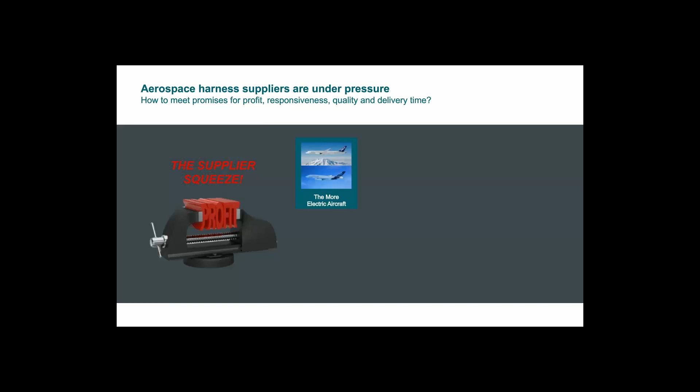Thank you, Steve. So let's get into it. Aerospace harness suppliers are under increasing pressure, and whether they're within an OEM or acting as an independent supplier, these manufacturing teams are under more stress than ever. They find their business suffering from profitability constraints on all sides, from increased harness complexity driven by more electric platforms to the need to rapidly transition design changes into production, to serving demanding customers who expect ever lower cost assemblies delivered just in time, while they threaten to further vertically integrate into harness manufacture.

Meanwhile, platform designers are changing their electrical systems and consequently their harnesses ever more frequently to respond to the changing demands of their customers. They expect their harness suppliers to keep up, transitioning these changes into production quickly and with a minimum of cost and schedule impact. These trends in the industry make it ever more difficult for harness manufacturers to meet expectations for responsiveness, quality, delivery time, and profitability.

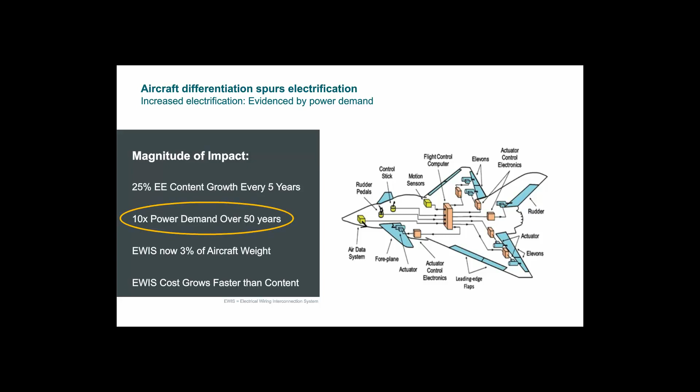You can see both of these trends depicted in this military aircraft example. This has led to a vast increase in the number and extent of electrical systems on aircraft. We can see just how much by examining the amount of power generated on a modern aircraft. While electrical power generation has been increasing throughout the history of aviation, over the last 50 years, it's increased by a factor of 10. Most of that has arrived with what is known as the more electric aircraft.

For example, Boeing 787 can now produce about a megawatt of electrical power. That means that on a 19-hour flight from New York to Singapore, the 787 produces enough power, or could produce enough power, to supply 21 American homes for a month. That's a lot of power.

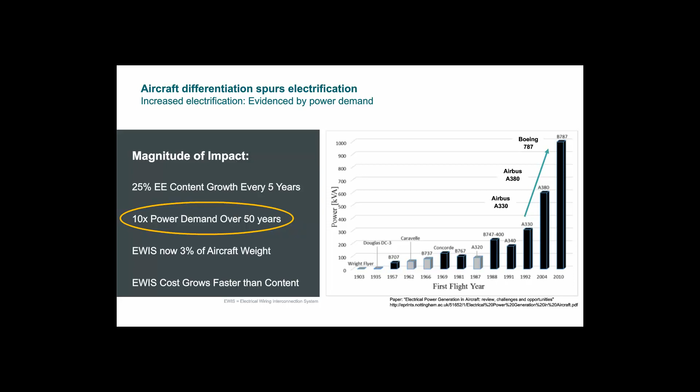This increase in reliance on electrical systems has had a consequent impact on the complexity of the aircraft electrical distribution system, or EWIS. Today, it's not unusual for modern aircraft to support electrical systems with more than 500 kilometers in total cable length, up to 100,000 wires, and more than 40,000 connectors. The electrical wiring system now represents a significant weight driver, comprising about 3% of total aircraft weight. It can exceed 7,000 kilograms on some aircraft.

This relatively new reliance on electrical systems has substantially increased the risk our programs face, especially as they transition to production. Current processes were developed for a world where most of the functionality was implemented mechanically, including pneumatics and hydraulics. As an industry, we know how to work around late-breaking problems in these disciplines without major program iterations.

Now, with electrical front and center in new capability implementation, and this includes networks and software, there is a lot more at stake. A problem discovered in first article integration or transition to production can mean a major development cycle, potentially costing billions of unexpected dollars. This not only puts a program at risk, its cost and schedule, but also the reputations of the program team, the reputation of the business unit, and in the worst case, the viability of the company itself.

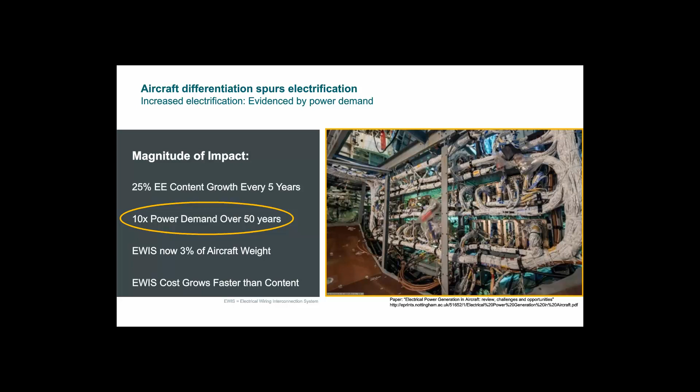At the same time, platform OEMs are requesting more changes to implement the EWIS than ever before. First, they must increasingly respond to their customers' needs for bespoke platform configurations. They not only must answer these demands from their customers, but they are also using responsiveness as a way to differentiate themselves and gain competitive advantage.

Next, regulatory flight certification is becoming more and more stringent. Not only are the regulations changing in response to new incidents, but the ability to avoid their application through grandfathering of new aircraft variants has disappeared.

Finally, OEMs and suppliers must integrate changes arising from electrical system design improvements for cost reduction, manufacturability, reliability, and performance.

Together, these vectors of change stress harness manufacturers, whether they are vertically integrated teams within the OEMs or external Tier 1 suppliers. They need to respond to change from both the OEMs and their own harness product and process engineering teams. And they must do this urgently, as electrical system changes are frequently communicated at the last minute, with little time to spare if a production program is to meet its schedule.

All this results in a new harness manufacturing reality: more harness variants produced in more frequent, shorter duration production runs, and in smaller quantities. So Steve's going to examine what this can mean for achieving profitability.

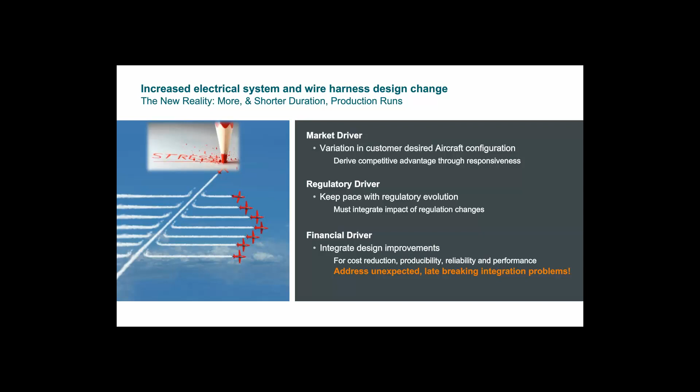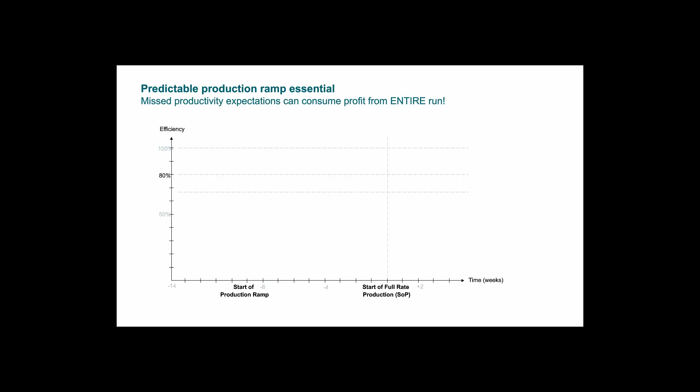Okay, thanks, Anthony. I wanted to talk a little bit in the context of what Anthony was discussing, about one of the challenges, which really comes up when you look at your ramp up of production, as well as incorporating changes. If you look at the chart here, we've got an efficiency level on the left and a period of time. Typically, a manufacturer will sit down and come up with a ramp up plan, and it'll start ahead of having to achieve full rate production, which is represented as SOP here, start of production. This probably looks real familiar to everybody. It's a typical learning curve in a ramp up.

The reality, though, where the challenge comes in, is we're trying to get to our profit level at the 80% point. However, when we implement this, things can happen, right?

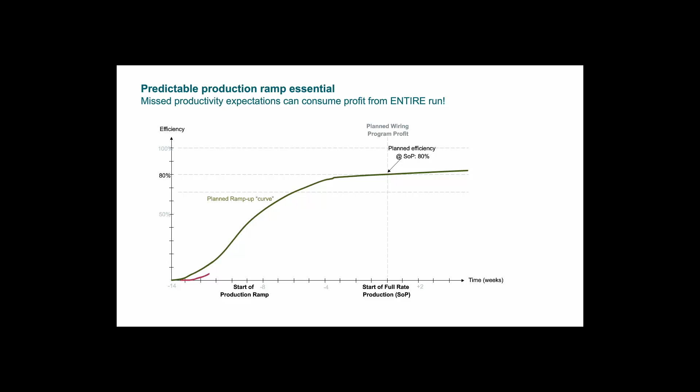If a harness is complex, humans are planning this process, therefore mistakes get made. It could be in the tooling, it could be in work instructions or any of the other production artifacts. So what actually happens is this sort of sawtooth of progress, with a little bit of backstepping as issues get found and have to be resolved.

Of course, while we're addressing the issues, time continues to move, and eventually we find ourselves at the point where we're ready to start, or the date we set for starting full production, but we're below our target efficiency. So in this case, our target was 80%, and let's say we're at 67%.

Eventually we get to 80%, but at that point we may have actually lost our entire profit for our production run. And when you combine that with the frequent and shorter production durations, this really is a recipe for disaster from a margin standpoint for our organization.

So Tony's going to talk a little bit about some of the things that can be done to improve this situation.

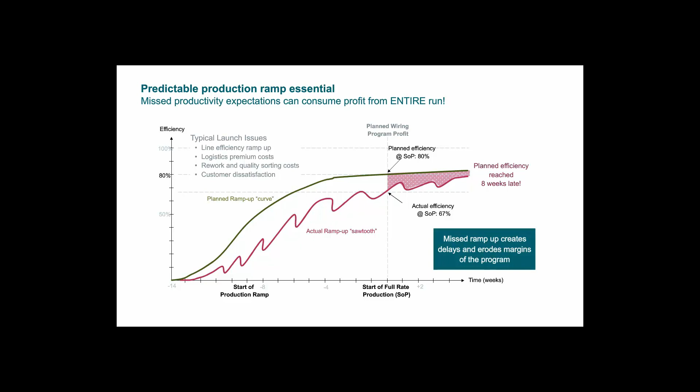Before I get there, I'll mention that this situation is actually even worse than Steve mentioned, because our ability to avoid and recover from these mistakes is being hampered as we lose our best people to retirement. I won't spend a lot of time on this, but a generational demographic shift is underway in our workforce right now, and our largest, most skilled employee cohort, the baby boom, is retiring. As they leave all our organizations, not just the manufacturing ones, the expertise and tribal knowledge we've relied upon to proactively avoid error is leaving too.

This means it is even harder for our teams to deal with the challenges presented by the demands of modern harness manufacture.

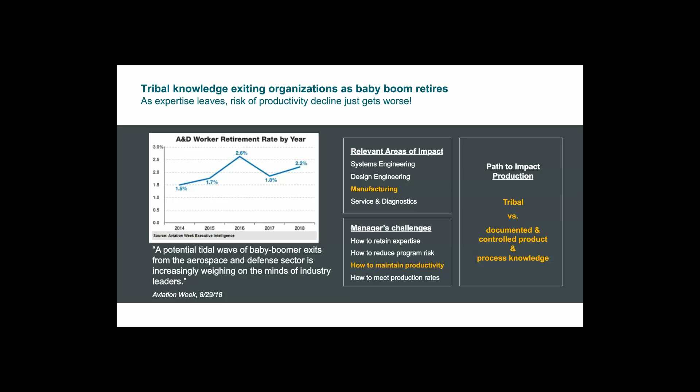Finally, the tools used by most harness manufacturers today don't make their task any easier. Generally, the state-of-the-art for manufacturing engineering employs manual processes and slow, disconnected tool sets. These processes are time-consuming and expensive. They often miss or even introduce errors into manufacturing tooling and work instructions, leaving issues to be found late in the game, even after the manufacturing cycle has begun. This forces expensive design iterations and process changes.

So what are we to do?

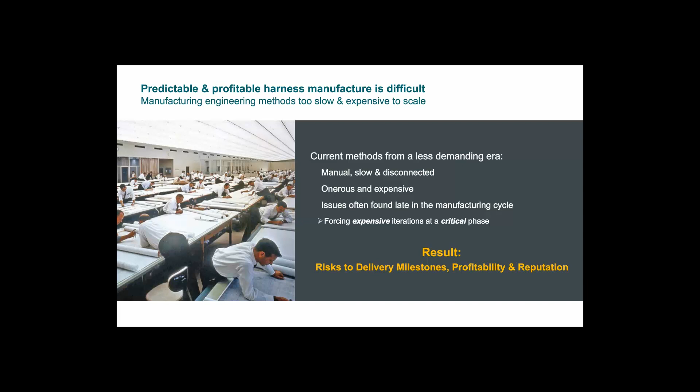Well, the most sophisticated members of the manufacturing community recognize the need to change. Using a technique termed digitalization, they are applying digital technology to transform their business processes. They are already adopting model-based development techniques from concept development through design into manufacturing to reduce cost and schedule risk, accelerate production ramp, and improve productivity.

As shown here, leaders in the United States Department of Defense endorsed this shift to a digitally connected design and manufacturing ecosystem.

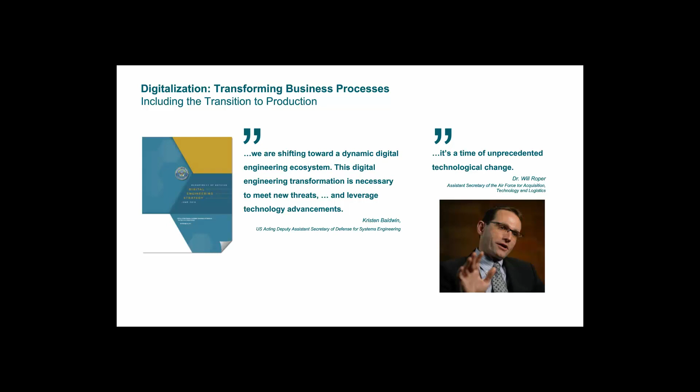And for those forward-acting companies, the benefits are already paying off. Take the case of the Boeing Saab T-7A trainer program. By using model-based development techniques, they were able to go from platform concept to first flight in under 3 years. As Boeing's chief engineer, Paul Niewald, stated, 'We are competing against proven, in-production aircraft, so we had to do things differently.'

The result: by applying model-based development techniques, the Boeing Saab team was able to build their confidence to the point where they could bid $10 billion below the U.S. Air Force's expected lifecycle program cost. This won the program for them.

In companies like these, program design teams build a configuration-controlled digital twin or model of the platform's electrical system. The manufacturing engineering team uses this electrical digital twin to develop its own digital twin of harness production. They use this to design, plan, and optimize the overall production process.

Electrical and electronic systems development platforms like Siemens Capital are architected to ensure digital data continuity is maintained as the program proceeds from phase to phase. They do this using an underlying digital thread.

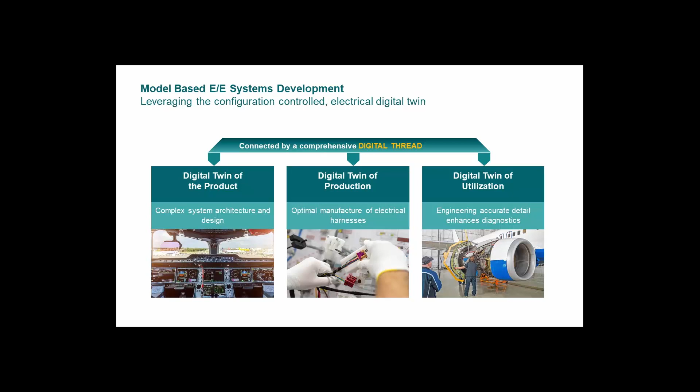While Capital has always been a model-based approach to electrical distribution system development, it has recently expanded to support electrical system modeling, electrical system architecture design and optimization, and software network development. These two are fully integrated across the product lifecycle and make use of assistance from many of Siemens' market-leading solutions.

Capital consumes information from a variety of requirements and system modeling environments. It normalizes this information to feed the platform electrical system development process.

This begins with the capture of an electrical and electronic system functional model. This functional model not only incorporates all the tasks and roles expected of the electrical system, it also accounts for all communication between these functions and maps the relevant system requirements to them. These are important features of the model to get right early in the electrical system development process, since by virtue of the digital thread, these relationships will be preserved throughout the platform lifecycle, including during the transition to harness manufacturing.

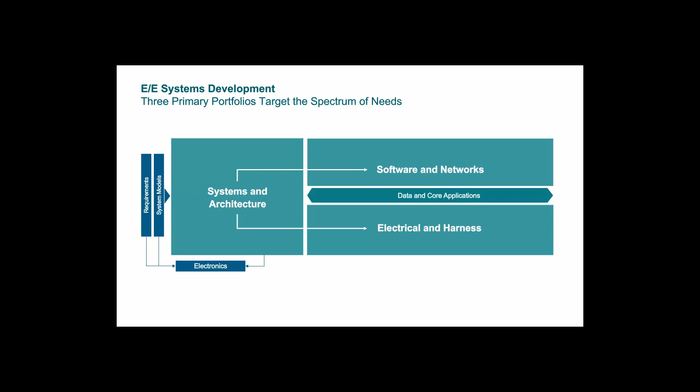This enables electrical systems engineers to design and optimize electrical system architecture. They explore architectural options to better understand the impact of trade-offs early in the development lifecycle and are empowered to pick a better starting point for all the effort that follows. This means fewer unanticipated changes at the architectural level that ripple down through the electrical systems design and ultimately result in change to harness production configuration.

Armed with the chosen architecture, Capital extracts the information necessary to implement the electrical system. It intelligently parses this information to feed lifecycle development in 4 separate but related electrical disciplines: electrical distribution, or EWIS, electronics, communication networks, and software. Each discipline uses this data across the complete development lifecycle from design through production and finally into operational maintenance.

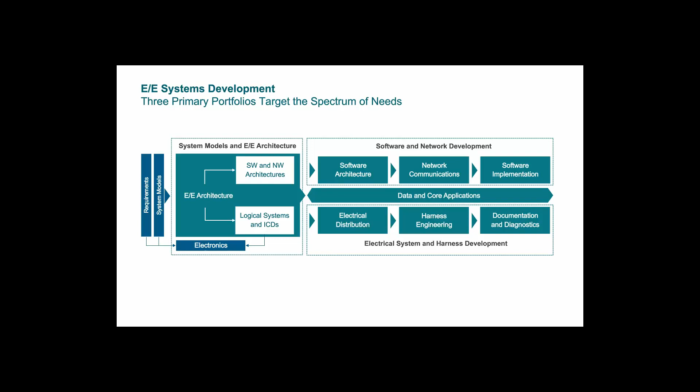Capital's digital thread not only connects these related electrical disciplines, it also extends to the mechanical discipline and to the platform's product lifecycle and application lifecycle management environments. This allows electrical and mechanical co-design, platform-level configuration control and revision control, and the capability to configure the platform across domains and up and down the product development lifecycle.

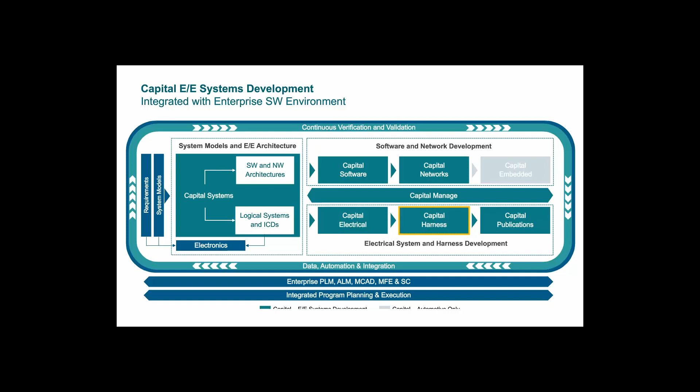Today, we focus on the harness domain within the electrical system and harness development flow. Steve's now going to introduce us to the digital thread and flow that actually serves this domain specifically.

Thank you. The tools and processes that comprise the harness domain represent an advanced solution unto themselves. The overall flow ranges from harness design and costing to work instruction generation. It encompasses product engineering, including product cost optimization, form board design, assembly and subassembly design, manufacturing process design, optimization, and documentation. As was mentioned earlier, the tools directly access the electrical system digital twin to enable an automated harness manufacturing engineering flow that requires no manual data entry. As a result, generating important manufacturing aids, tooling, and even cost estimates is seamless and becomes second nature.

2 items to note in this flow are the capability to do line balancing of assembly tasks for smart resource utilization and the capability to do process simulation to validate and optimize the process.

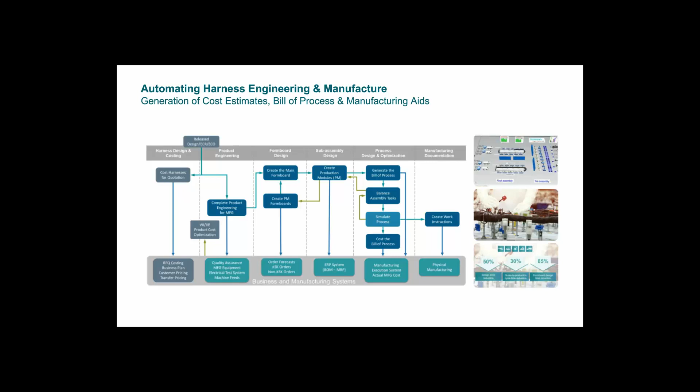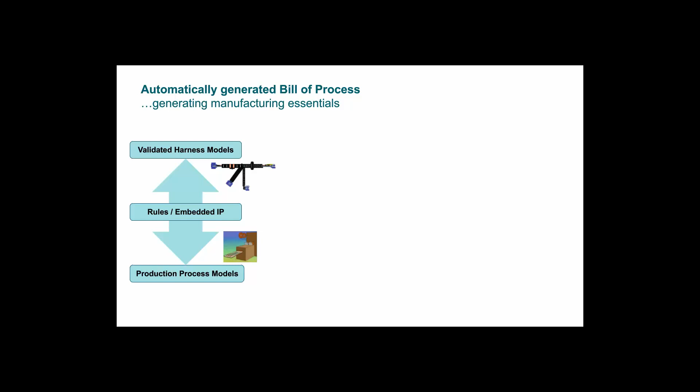The tools enable better retention of institutional knowledge as well. Every company has its rules and production process models, and these tools capture that, as well as provide the capability to validate the harness models early in the process. With this information, the bill of process can be generated automatically, resulting in the outputs needed to supply information to downstream customers.

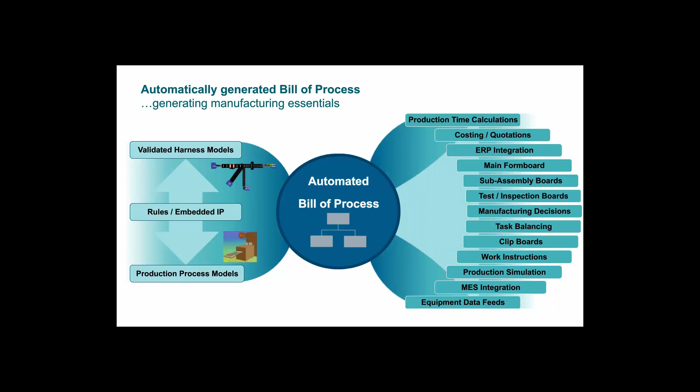Feedback can be gathered from the various users and incorporated into the upstream inputs, with the automation also providing an efficient way of supporting continuous change and improvement back into the outputs.

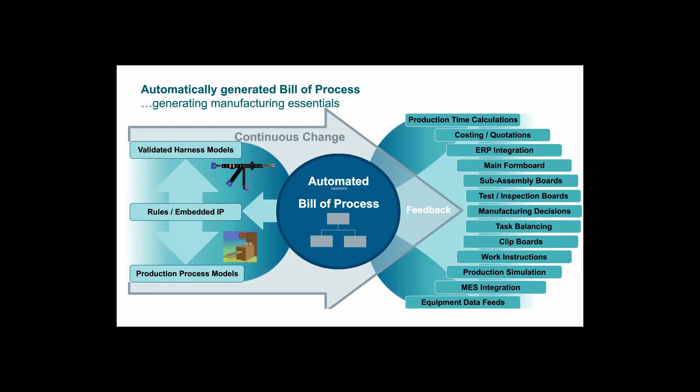I'm going to take a moment and talk about two capabilities specific to form board design that I'd like to highlight that can provide substantial benefit to a harness manufacturer. The first one addresses the need to reduce tooling costs, optimize factory space, and storage of form boards.

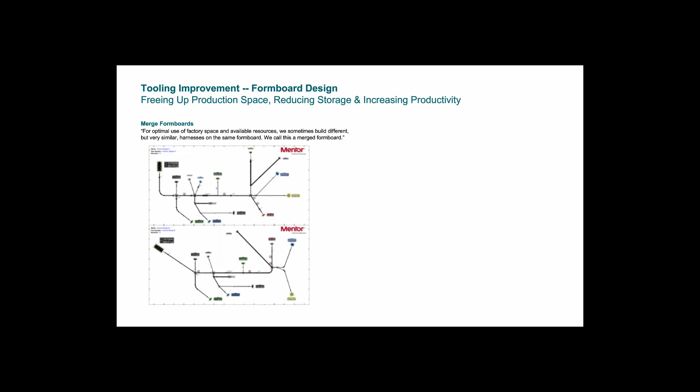So here we see two form boards for harnesses that look relatively similar, but they have several different branches and terminations, so maybe they're similar with about 30% differences. Now typically, this would mean generating two different form boards that need to be managed, built, stored, and take floor space. If we merge these form boards into a single form board, we can produce either harness on this form board. You can see the differences highlighted in either blue or yellow to make either harness, and this will reduce the number of form boards that need to be created and managed.

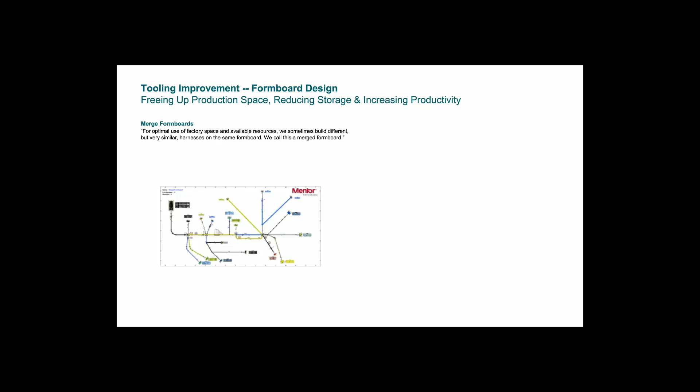Getting some noise on the line here. I'm not sure where it's coming from.

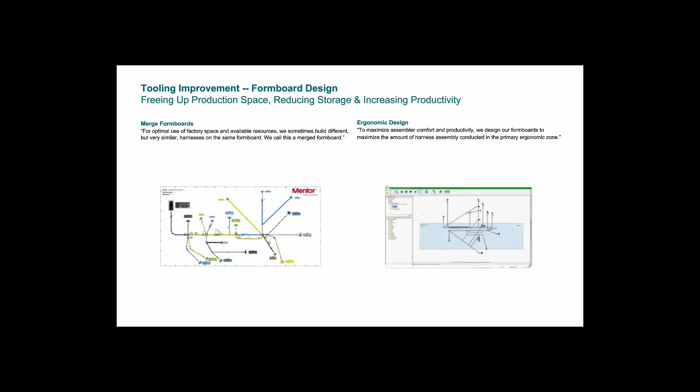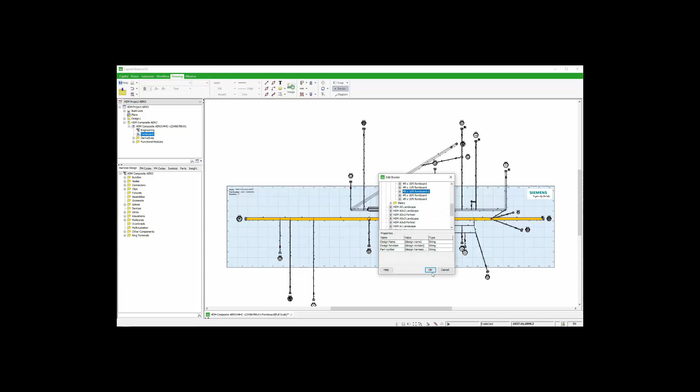The second capability I would like to highlight is the assistance the tool provides to create ergonomic form board designs and improve efficiency. So in this animation, we'll walk through how a form board is made. When starting, the harness is brought in and flattened, and it will need to be arranged. Starting with the main trunk, the harness is positioned onto the board into an optimum work zone. As you can see, you can turn on some color shading here, so we want to maximize what is in the green area, which is the most accessible space.

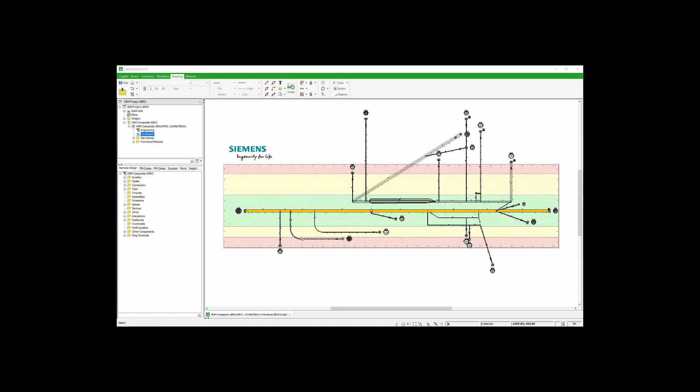So you can position the different branches by grabbing the grip points, stretching them, locating them. One thing you'll notice is that in the bends, the system knows what the minimum bend radius is for each of the bundles and maintains that. And as we move this around, you can zoom in, you can see how we're bringing everything closer to the center, providing good space.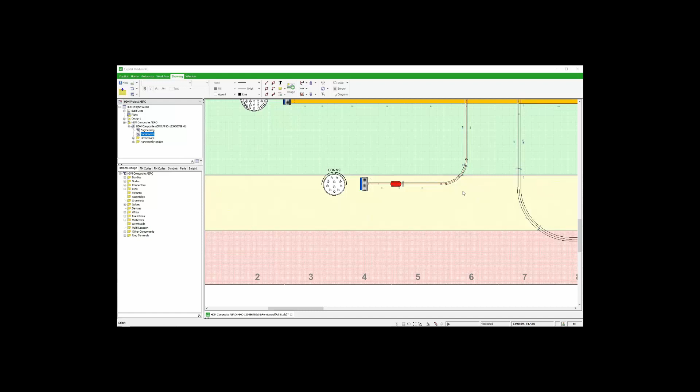I'll let this go a little bit longer because one of the other benefits that this tool provides is there's an Insight tab on here where it can actually keep track of how much of the harness fabrication steps are within the green, yellow, and red zones. We'll get to that in a second.

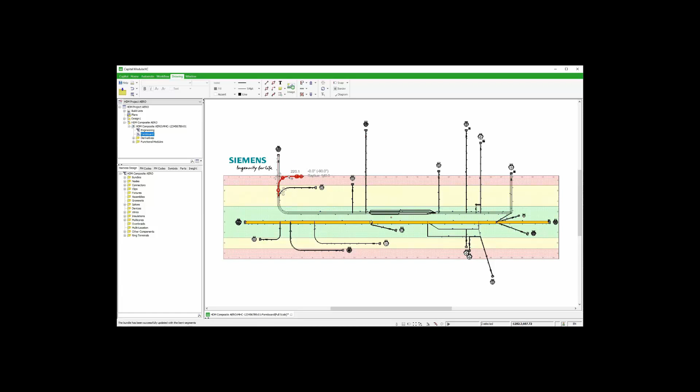So now we'll look at the Insight tab. And it actually will show you, as we move things closer to the center, the quantity of work that's falling in each of the spaces.

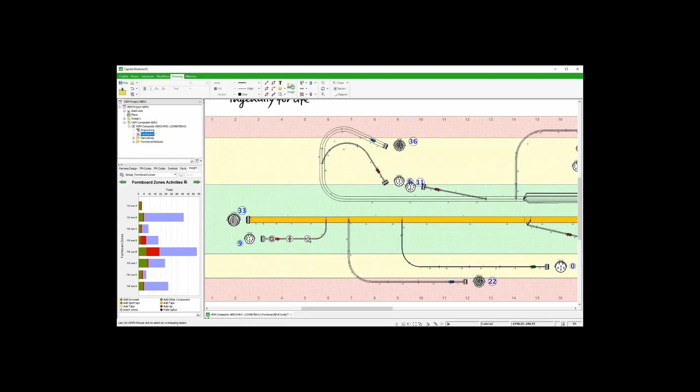So this is a clear example of how model-based development can impact favorably harness manufacturing to allow a lot of the work to be done in the back shops and avoid, reduce installation time.

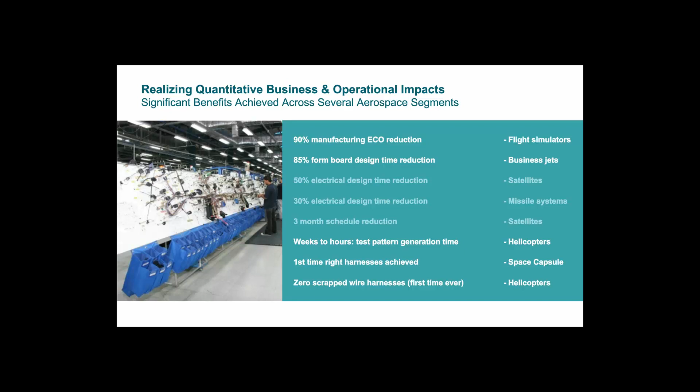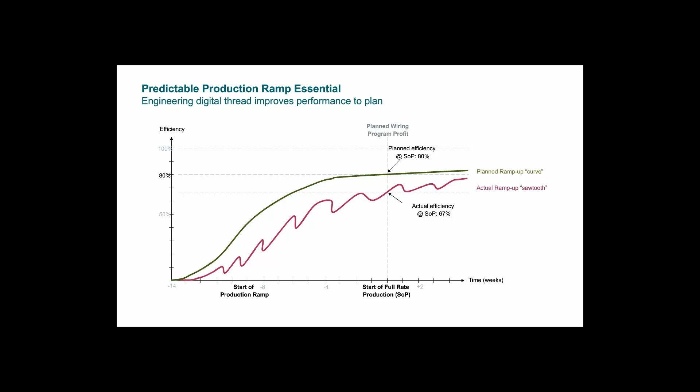So I'm going to come back to this chart I showed earlier, looking at production ramp-up. This is what we saw before, and I think everybody can agree that if we use better tools in the design process, we can improve upon our plan. So we front load the activities, we have vetted libraries, we have DRCs, which are design rule checks, and we've got validation capability in the tools. So we would expect the ramp-up to improve like so.

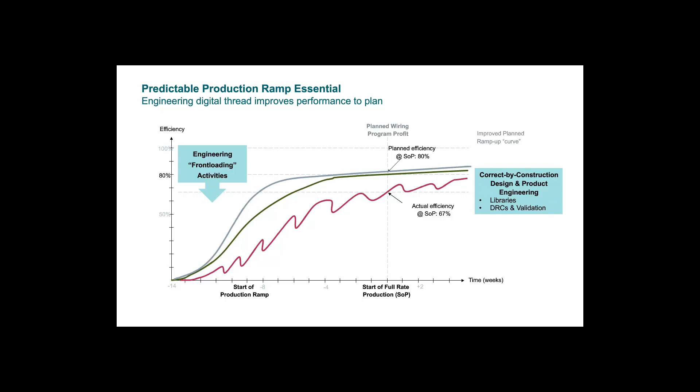However, this is really sort of a small gain compared to what we will see in actuality. So the tool brings into it the ability to simulate, analyze, optimize, and validate the manufacturing process. So what we can expect to actually achieve is a similar sawtooth effect as we work through the challenges that come with any ramp up. But as you can see, it's much closer to the planned ramp line with a lot less extreme variations because we've had the capability to simulate and work out kinks before we actually started into production.

So Anthony is going to wrap this up here by discussing what this means for your business.

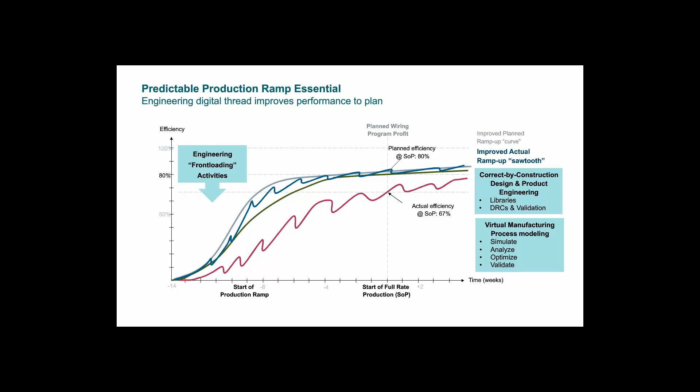Yeah, and what I want to emphasize is that the power of this environment is the access to the digital twin of the electrical system throughout the product lifecycle. By harness manufacturers having access to that information directly, they can automate and reduce the errors associated with the entire set of artifacts required in order to move through their manufacturing process.

And companies that are applying these model-based techniques today are realizing quantitative business and operational benefits. You can see that the value of taking action to digitalize business processes is substantial. In a recent study, the OECD found that companies who took the initiative to digitalize, as we described, have increased productivity by as much as 25% and propelled themselves into the top 5% of their industry's financial performance cohort.

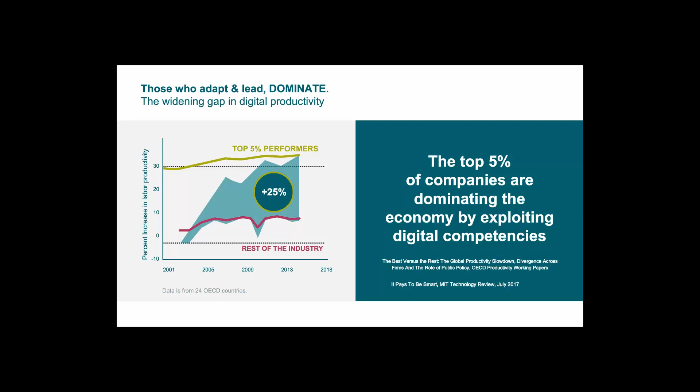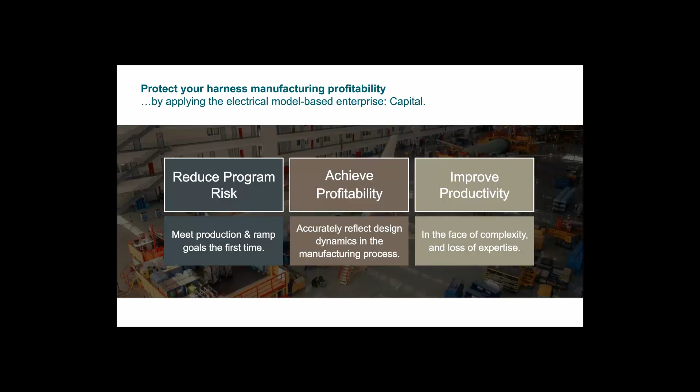So thank you for joining today. In summary, a model-based harness manufacturing engineering solution contributes to retaining and even improving your reputation for predictable harness manufacture. Using a comprehensive electrical and electronic systems development portfolio provides harness manufacturing engineers direct access to the configuration controlled digital twin of the platform's electrical system. And this accelerates manufacturing engineering, reduces errors, and enables manufacturers to respond dexterously in the face of change. The result is higher productivity, less scrap, and ultimately greater profitability.